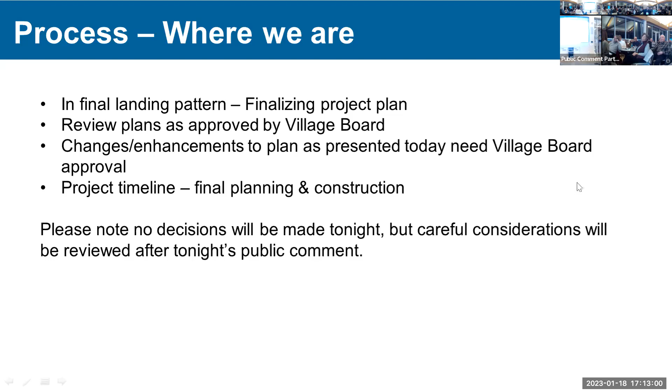So, the project overview: the project basically consists of three parts—the South TAP project, the North TAP project, and the core project.

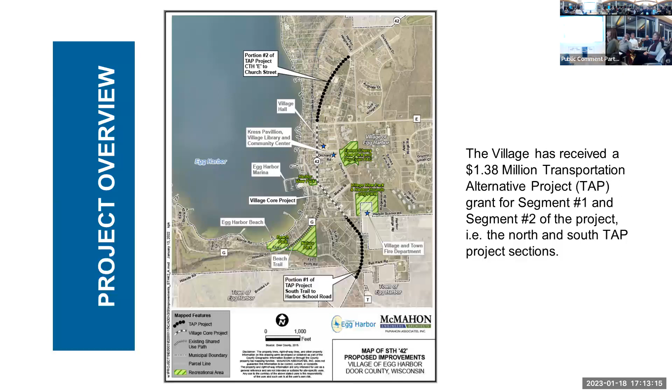We'll start on the south side and discuss the South TAP project, move to the core, and then move up to the North TAP project. What does that consist of? Well, let's go to the next slide, Megan.

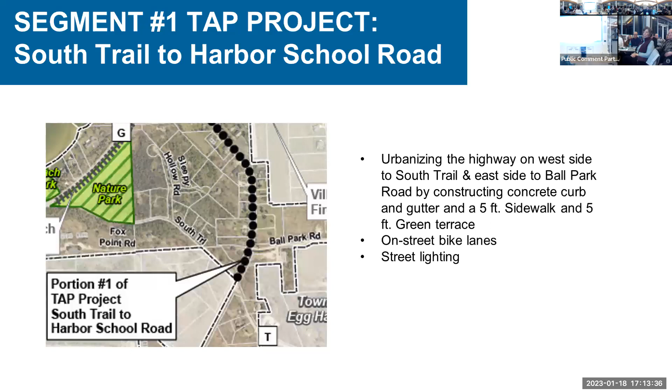The TAP project consists of putting in bike lanes, curb and gutter, grass terraces, sidewalk, and lighting. So what you see here is basically the design for the North and South TAP sections.

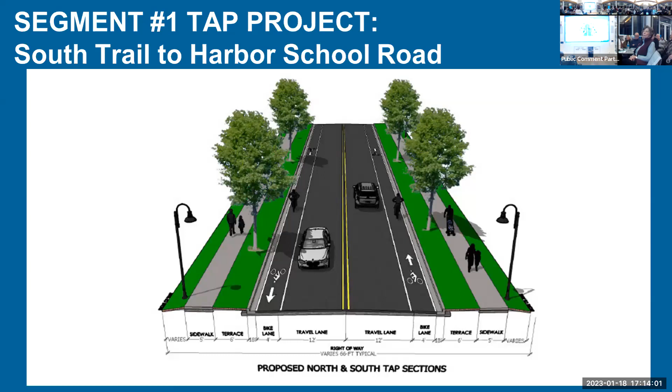In the core project, things change a little bit. We have a 5-foot sidewalk on both sides of the highway, a 5-foot paved terrace between the sidewalk and back of curb, with brick accents along the curb, 8-foot parking lanes, bike accommodations, and 3 dedicated left turn lanes—northbound at County Highway G and at White Cliff, and southbound at the Main Street shops.

As was proposed at our last public meeting, the utilities will be buried. At Highway E, between 42 and Church Street, we'll be putting in curb and gutter on both sides of the street and sidewalks on the south side. We'll also be reconfiguring the Bertschinger Center parking lot to maximize parking.

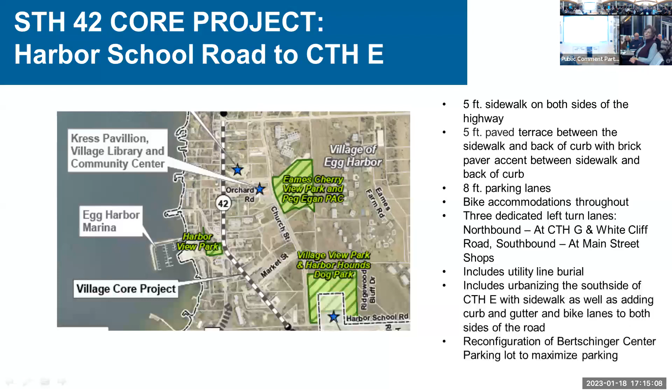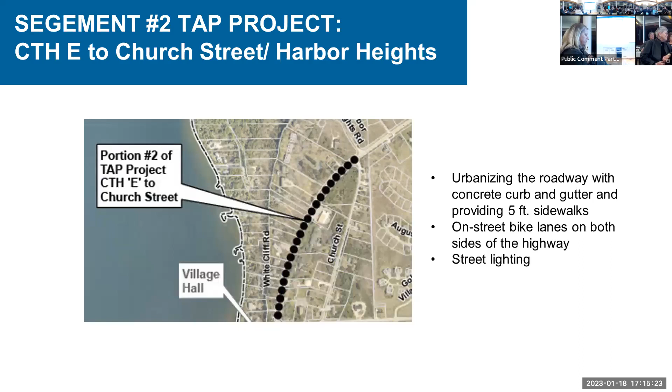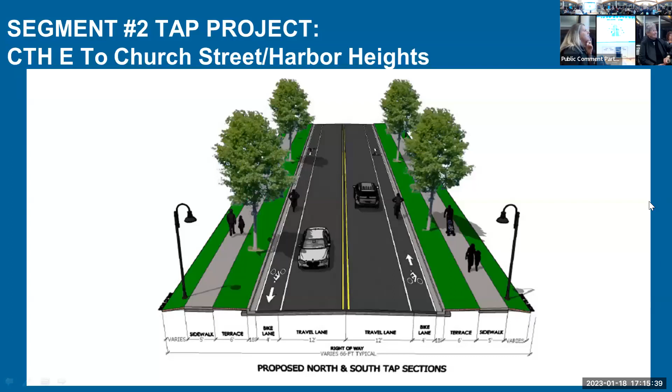That brings us to the North TAP project, and again it's the same thing we saw on the South TAP: 2 drive lanes, bike lanes, curb and gutter on both sides, landscaping terrace, sidewalks, and lighting on both sides of the street. So that's basically it. I'll turn the podium back to Megan.

All right, we are going to be sharing a virtual rendering of the core project with you all tonight, and then some still renderings of the core project as well. I just want to point out a couple notes in terms of those renderings.

If you're joining us here in person, a lot of the still renderings are on display on the east edge of the building here. The video and still shot renderings are virtual renderings of the core project based on drone footage that we took back a few years ago, so there may be some discrepancies as things have changed since then in the village.

Pedestrian rest areas shown in the video are suggested locations. Those locations are outside of the right of way, so we'll have to work with individual property owners on the placement of those. They're just being shown as suggested locations in the renderings you're going to see.

The accent trees and ground plantings need to comply with Wisconsin DOT line of sight guidelines, so there could be some modifications made to those specific species. We also have some finalization to do in terms of the tree grate selection. As you'll see in the video, the paver brick pattern is diagonal.

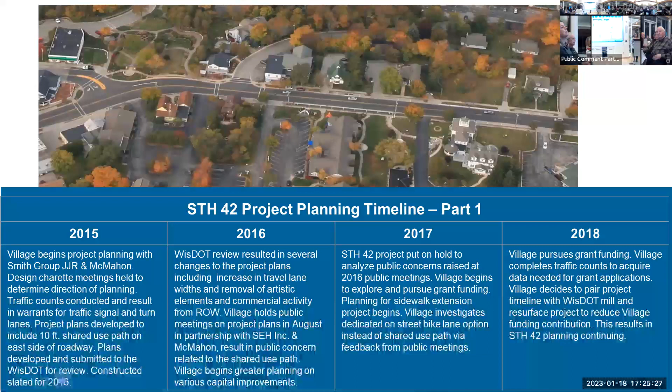Picking up in 2019, the village formally decided to eliminate the shared use path design and incorporate on-street bike lanes. The village partnered with McMahon to develop a 3D animation for the project, and committee members visited other municipalities to review their completed projects. In 2020, the committee reviewed concerns related to the turn lane and looked at options to increase parking throughout the project. At this point, the on-street bike lanes were eliminated and bike accommodations were incorporated into the plans instead.

At this point, the village was awarded a $1.382 million Transportation Alternative Program grant for the north and south sidewalk extension project. In 2021, the village reviewed various options for utilities and decided to table that decision until public meetings were held in August of 2021. After those meetings, given great support for burial of the utilities, utility burial was incorporated formally by the village board into the project plans.

In 2022, we were caught by surprise by a dwarf lake iris species flagged by the Wisconsin DNR as a potential threatened species affecting the project. As a result of that and some other factors, the village board ultimately decided to delay project construction to 2023. Had we not done that, this project would currently be under construction today. So it was delayed for a year.

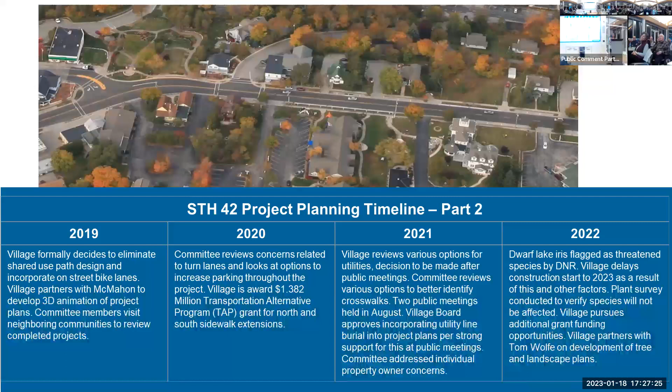Now let's take a quick look at the project purpose and priorities. There's an overarching purpose to replace and enhance our infrastructure, since we have deteriorating and aging infrastructure. More specifically, the priorities are to improve safety for motorists, pedestrians, and bicyclists, promote ease of walkability, improve multimodal connectivity throughout the village, improve access and ease of parking, and maintain the village aesthetic.

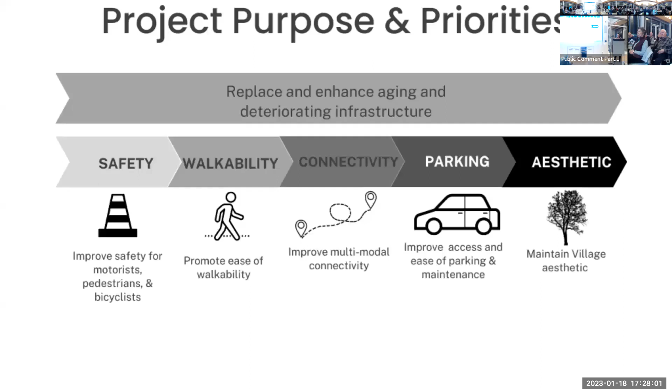Some key project elements related to safety include narrowing the roadway to the minimum allowable by the Wisconsin DOT, traffic calming measures, which we'll review in more detail in a moment, improved pedestrian crossings, additional turn lanes, and rerouting village core bicycle traffic to Church Street.

More specific elements related to traffic calming include narrowing the roadway to the minimum allowable, street trees and planting areas, and urbanizing the highway corridor, starting at South Trail on the south end and Church Street and Harbor Heights on the north end. So as you're coming into town, you're prompted by curb, gutter, sidewalk, and street trees to know you're entering the village, beyond the limits that exist today.

Bump outs will define the entrance to the core and within the core, so that as you're entering the village core, you have a visual cue that the corridor is narrowing, signaling you to slow down. There will be crosswalks with signs, and after construction is complete, we will ask the DOT to conduct a speed study to analyze the speed limit, since speeds throughout the village continue to be a concern.

Our main street is a state highway, which eliminates any authority we have over the speed limit. So we're hoping that these measures we're putting in place will naturally slow speeds, resulting in a speed study recommendation to lower the speed limit throughout the village.

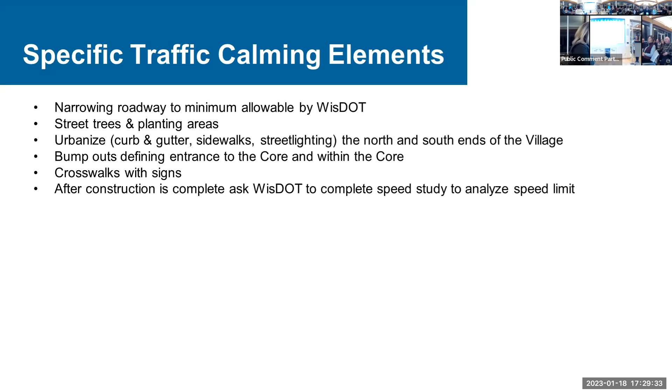Key project elements related to walkability: after construction, sidewalks will meet ADA accessibility standards, and we'll have wider sidewalks to accommodate families and groups. Encroachments throughout the corridor will be removed, and there will be street trees and plantings along the sidewalks.

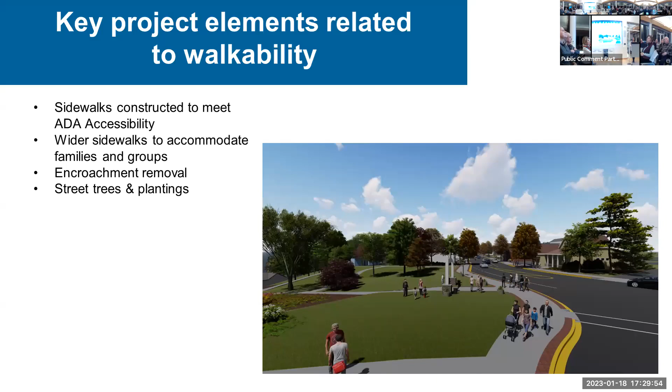Key project elements related to connectivity: sidewalks and bike lanes will be extended south to South Trail and north to Harbor Heights and Church Street, providing access to businesses and residences on either end of town. These are the two areas the grant applies to. On the map shown, the red highlighted area indicates where off-street pedestrian accommodations exist or will exist after construction of the State Highway 42 project.

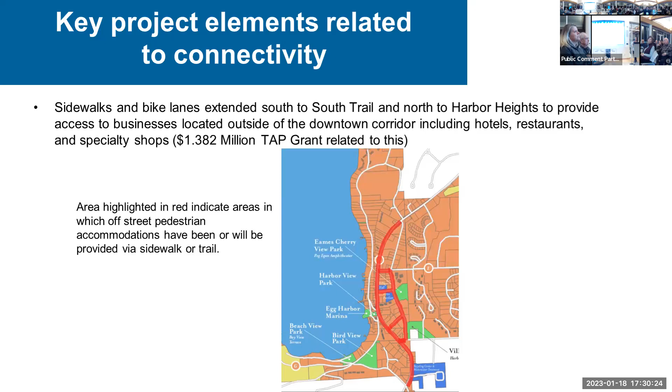Key elements related to improving ease of parking and maintenance: there will be an increase in on-street parking spaces and improvements to the Bertschinger Center parking lot to maximize available parking spaces. Parking space ingress and egress will now be at a 45-degree angle versus the 90 degrees that exists today, for ease of use, efficiency, and ease of snow removal. Since the 45-degree angle is more user friendly, there's less time driving over the curb, resulting in less curb damage.

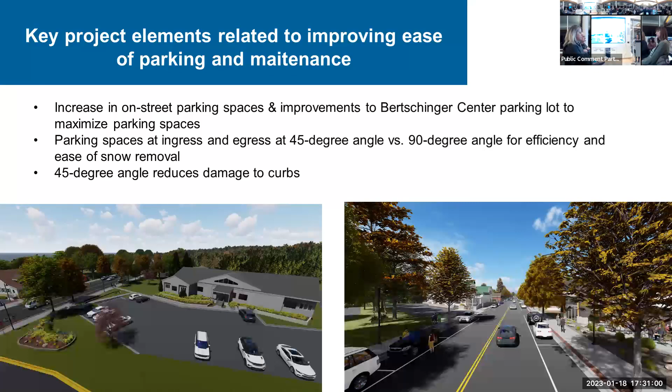Taking a closer look at parking related to the project.

There will be a net increase in parking when all is said and done. Looking at specific areas: from Harbor School to Market Street, 19 stalls exist today, 34 are proposed. Market Street to County Highway G, 19 exist today, 24 proposed. County Highway G to Orchard Road, 26 exist today, 25 proposed. Orchard Road to County Highway E, 10 exist today, 39 proposed. So on-street totals only: existing today there are 74, and as proposed there are 122.

This includes the Bertschinger Center improvements. That lot, Bertschinger Center specific, not including the post office side, has 21 dedicated spots that will be increased to 37. Taking a look at all parking improvements related to the highway project, there's a net gain of 64, with 95 existing and 159 proposed.

Also, in addition to the State Highway 42 project parking improvements, we have recently added 188 parking spaces on Church Street.

All right, and lastly, key project elements related to maintaining the village aesthetic: narrowing that roadway, lining streets with trees, both street trees and accent trees, adding planting areas, and providing pedestrian rest areas along the State Highway 42 corridor.

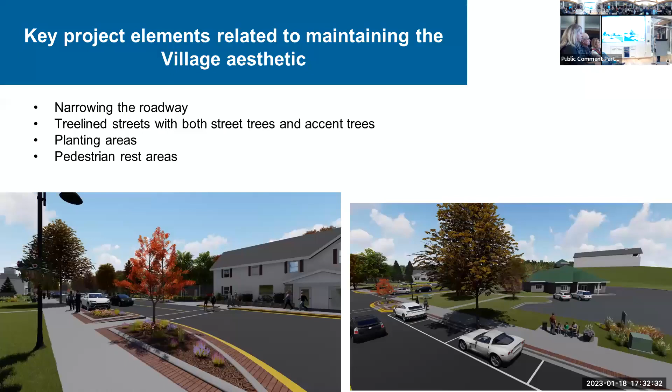Speaking of the trees lining the corridor, I'm going to pass it on to Ken and Tom to review the street tree plan.

Thank you, Megan. Hi, everyone. Good to see everybody.

First, I'd like to introduce Tom. There you go. Good.

And an interesting fact about Tom, Jensen's great-grandson was an intern for Tom.

Very cool. All right, so we brought Tom in to do three things for us. First, to work with property owners along Highway 42.

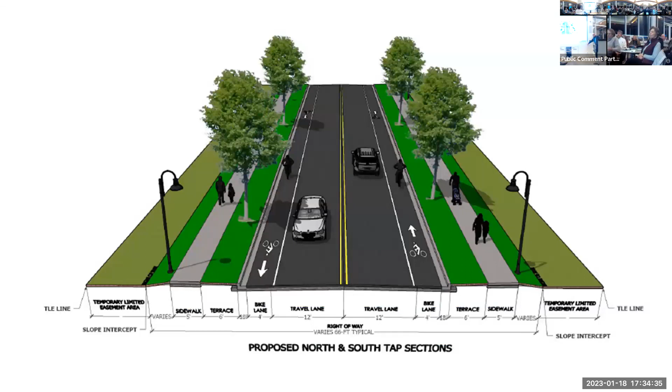So this is the North Tap area that was priority 1, I think starting in like... no. Oh, okay, that. Yeah, I need some spinach.

I think it was the August, September timeframe where some of the property owners up there came to us with some real concerns and fears about loss of trees in that area. And I can understand why those concerns were there. So first, I'd like to talk a little bit about this diagram to explain to everybody what area we're really talking about.

This is called a typical section or a cross section, and the key is down here. We have a 12-foot travel lane - along with the bike lane, the 12-foot travel lane is the narrowest travel lane we can have. Then from the curb to the sidewalk, it's called the terrace. Then we have the sidewalk. Then we have this little area where you have to blend the edge of the sidewalk to the ground along those properties - that's called the slope intercept.

And then when you get out of the slope intercept, there's something called a temporary limited easement area, where some construction equipment and people have to work in order to finish this slope intercept off, okay? So the concern was that in the slope intercept and the temporary limited easement area, there's going to be some disruption.

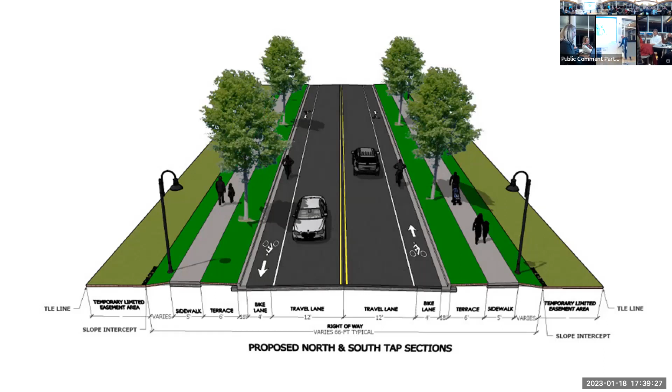Hello. Okay, everybody hear me? Yeah. All right, so what we're gonna do when we looked at this North Tap section...

The first thing we had to do was identify the trees, see what we're working with here and see what's worth saving. So we looked at the criteria of what's the health of the tree.

After we identify the species, there's a lot of ash in there. We all know the emerald ash borer is hitting ash up there. So we have about 37 to 40 ash trees that have to be removed. If they're not removed, they will become a nurse tree, and the emerald ash borer will then live in that and affect the other healthy trees in the area.

So we looked at trees, whether they were worth saving, the benefit of saving them. Some were buck rubbed, some are volunteers - meaning they were planted by themselves, and they're in clusters, on angles, growing into other trees. We asked, is it worth saving at the cost benefit?

So we marked all the trees that we are gonna try to protect, that could be protected with snow fence, physically protect them, or treat them, pre-treat them with a chemical that mitigates the damage from construction. It's called Cambistat. We've treated those trees.

We treated approximately 428 inches of trees in the North Tap and some in the core. What it does is it slows down the top growth of the tree, or the crown growth of the tree, and encourages root growth. That's the part of the tree that's going to be affected by the construction. It shortens the internode of the tree and puts the energy into the root system, and makes the cuticle of the leaves thicker so that it can survive the soil disturbance.

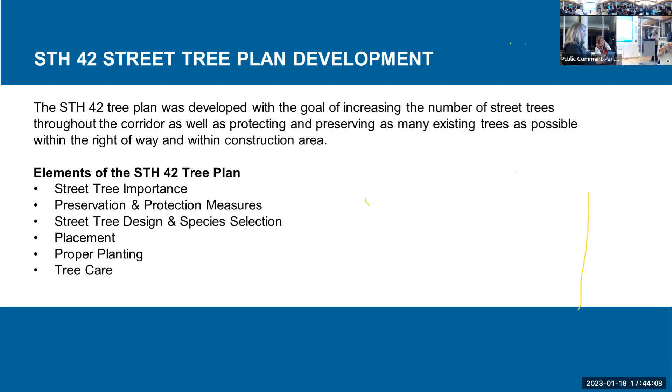So then we looked at what kind of trees we're going to put in and how many trees we were going to put in the North Tap, South Tap, and in the core. Approximately we have 52 trees in the core, 50 in the South Tap, and 70 in the North Tap. What we did with the design is that the core, of course, is going to have trees that can survive the urban conditions.

It can take compacted roots, it can take high pH, which we have here in Door County - that's a major problem, the pH. This tree is aesthetically pleasing. It's got really interesting bark on it, exfoliating bark.

This has been used and observed for about 30 years, since 1994, in urban conditions. It's used in a river walk in Chicago, used in parks in Chicago, used in Milwaukee, at the University of Wisconsin Arboretum and Longenecker Horticultural Gardens. So this is a very good tree for urban conditions.

It can survive drought - it's drought tolerant. It can stand flooding, and it's a riparian or river bottom species. This tree is extremely hardy. It's got a massive root system, which we need because with a situation like this road, you have a wind tunnel - high winds coming through there, coming off the lake. So we need something that can survive it. It's hardy to our zone, zone 5.

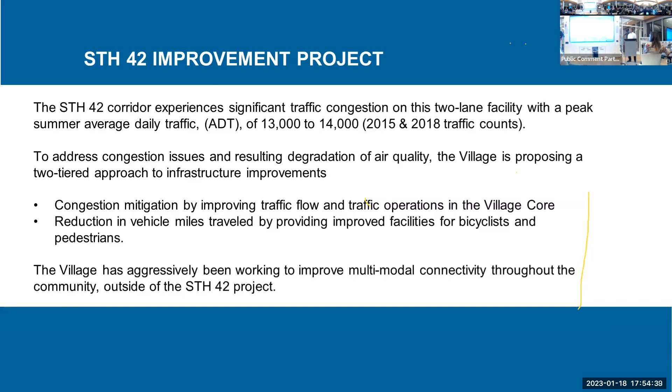The Village of Egg Harbor is a Wisconsin green tier community. The goal of the green tier community is to network and develop strategies leading to a sustainable future, and a big part of that is transportation management.

I mentioned degradation of air quality in the previous slide. I'm not sure how many people realize this, but Door County is one of 11 counties in the state of Wisconsin that is a non-attainment area for federal pollutant standards, ozone and fine particulates. So improving air quality is a real issue. The green tier strategy to reduce greenhouse emissions and vehicle miles traveled is, as mentioned previously, to make improvements to the infrastructure and improve traffic flow, as well as to reduce vehicle miles traveled by improving multimodal connectivity throughout.

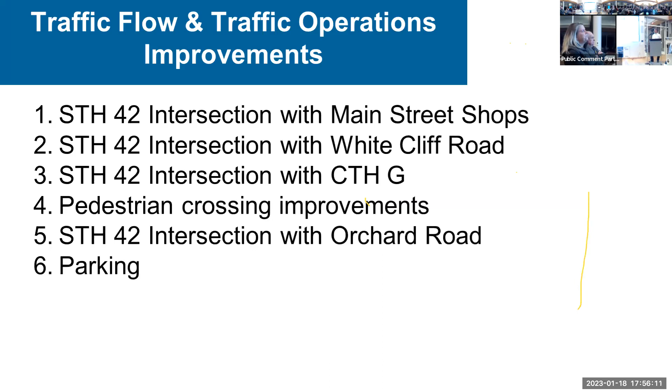The first prong we talked about is traffic flow and traffic operation improvements. There are 6 key steps to this, and we'll go through each in more detail. The 3 main ones are the intersections of Main Street Shops and White Cliff Road with 42, pedestrian crossing improvements throughout the corridor, improvements at the 42 intersection with Orchard Road, and parking improvements.

Currently, the way the project is set up, it's a 2-lane road, so if you're going through or turning left, you're doing it all from the same travel lane. By adding a left turn lane, you create the opportunity for vehicles to pull safely out of the through lanes of traffic and help prevent the traffic queues that build up behind it. I've seen traffic queues routinely in the summertime with 600 feet backing all the way up to Orchard on that approach, and the person doing the traffic counts noted this was happening throughout the day. These counts are done in July and August, so they're really the peak times, but it gives some idea of the issues that exist out there right now.

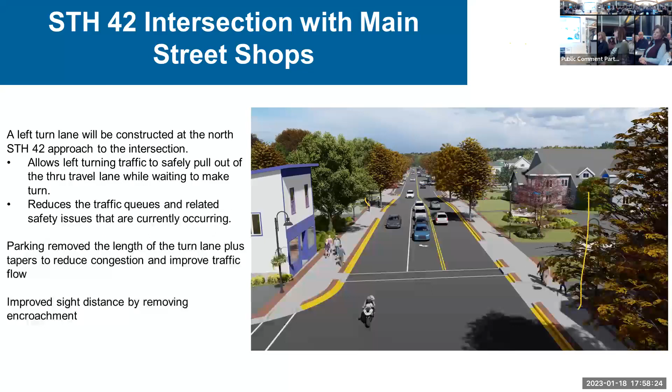That really restricts sight lines. As you're waiting in this left turn lane, Megan and I just did a practice run on it again today. You really have little time watching vehicles coming around that curve to see where they're coming from. There's a building encroachment at that location that the village is working with the property owner to remove a portion of it.

That will help improve those sight lines and provide us the room to make our improvements. Intersection of White Cliff Road, you can see we're just coming out of the turn here. That curve I mentioned previously, same improvements.

Move traffic into a separate lane so it can wait to make the left-hand turn, which reduces the traffic queues. The traffic queue is backing up, but it's occurring most significantly in the areas to the north from the Main Street Shops. By traffic blocking southbound traffic, these left turns onto White Cliff Road have an easier time because traffic is blocked to the north. But it meets the warrants for a left turn lane, and that's what we're pursuing here.

And the removal of the previous encroachment. This is the building we talked about. This drawing shows it without the porch that's on there right now.

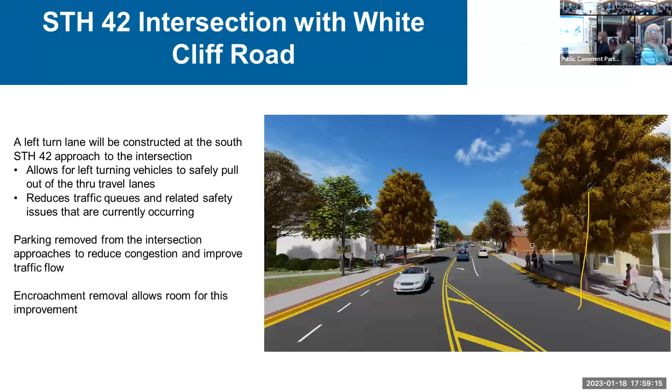Okay, here you can really see where the curve is coming out of G. You can see when you're up in here, it's very hard to see as you're coming around the bend. So the turn lanes are out there right now. We're maintaining the same left turns and right turns at this intersection.

We're removing some parking immediately adjacent to the intersection with G. That's right in here, there's a few stalls coming out. These stalls make it hard for vehicles coming out of G to make a right or left-hand turn. The sight lines are blocked by the turning vehicle, so we're removing those to improve the intersection sight distance.

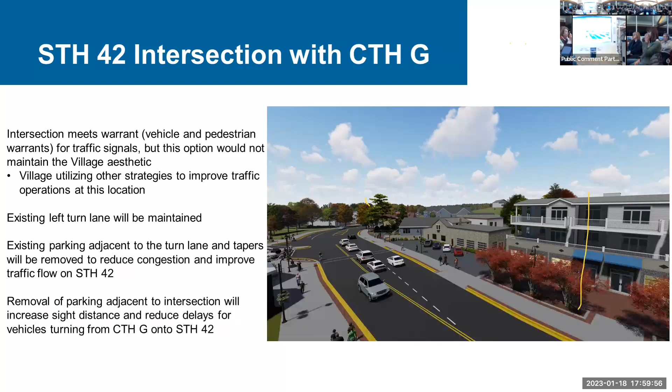Pedestrian crossing improvements. Looking to improve signing and pavement marking throughout the corridor to heighten the awareness of vehicles that there are pedestrians in the street. Currently, there's a lot of jaywalking in this area of the corridor, so we're trying to get them concentrated at a protected pedestrian crossing.

What we're showing here is the crossing that exists today at G. This was part of the overall concept for improving traffic flow on the corridor, to provide this crosswalk with the pedestrian refuge island out in the middle here.

Previously, if you remember, cars were stopping. Let's see, the pedestrian crossing was right in here. So it was very difficult for a car hanging a left off of 42 to see pedestrians crossing the road at that location. So now they're out in front where they should be, per current standards, and they're much more visible for vehicles.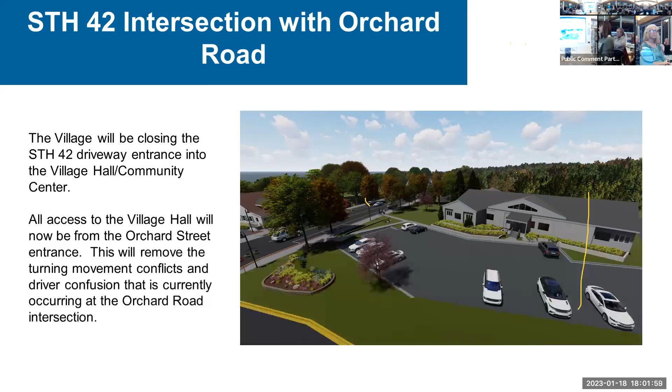Parking - and Megan mentioned parking previously. By improving parking, we make it easier for cars to get in and out of the stalls. Currently, there's a bump out at every driveway pretty much throughout, and the stalls are at 90 degrees, so it's difficult to get in and out of those stalls. The idea is to make it easier for cars to get in and out of the stalls, so they're not jockeying their way into their stall while people are waiting on 42 to get by.

In addition, by removing the bump outs at the driveways, those end stalls can be accessed without having to go through a bump out, which they currently do. So by removing the bump outs, it also provides us more space on 42 to add parking.

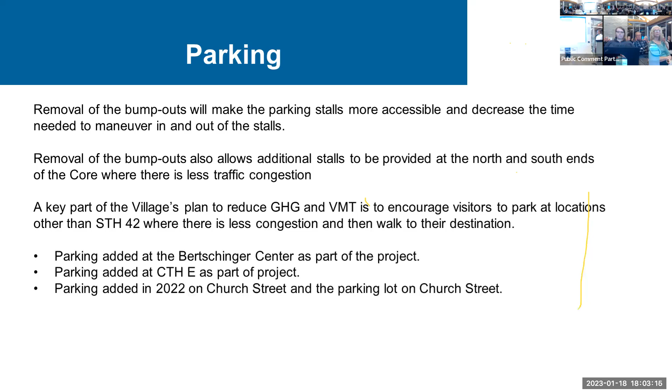Parking is added as part of this project and as part of the Church Street project to allow people to park in places other than 42, where it's less congested. For example, the center is being reconfigured, as Megan mentioned. We're also adding parking on E as part of the project on the south side of E, and then the parking added on Church and at the parking lot on Church. So those are the two parking additions.

Pedestrian improvements: there are obvious pedestrian improvements in the tap section, as there are no pedestrian facilities right now, except at the very south end of the north tap and north end of the south tap. So we'll be adding sidewalk throughout, ADA compatible sidewalk.

In the core, the existing pedestrian facilities are asphalt paths that are aged, narrow, and don't meet ADA standards. In a lot of places there isn't a terrace, or if there is, it's minimal. So we're constructing a new concrete sidewalk that's ADA compliant, with a consistent 5-foot terrace throughout that keeps pedestrians buffered between travel lanes and parking lanes. Also, when you open your car door, you're not opening into the sidewalk.

There'll be a paved surface back to the curb in the core areas. That'll allow people, when they get out of their car, to step onto a paved surface. It's also easier to maintain in the wintertime as far as moving snow.

We're installing a continuous energy-efficient lighting system to improve safety and encourage more use of the sidewalk. People feel more comfortable walking through a lighted sidewalk area versus walking through a totally unlit corridor.

The pedestrian improvements on Harbor School, the existing facilities at Orchard and on Market, provide links to the parking on Church Street. As for bicycle improvements, again, there are no bike facilities in the tap section.

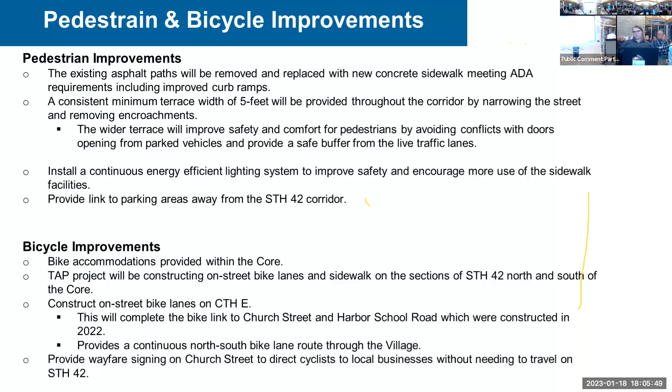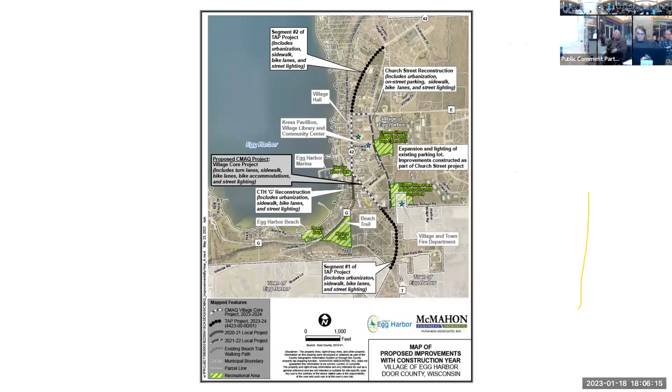We had a meeting in 2021 with some changes that happened to the plans over that time. The South Tap section was a big change. Originally, there were only sidewalk improvements on the west side of the road. The village made the decision to add them to the east side as well, down from Harbor School Road to Ballpark Road. Ballpark Road is a logical place to end it because there's an intersection there.

Originally, for stormwater quality elements of the project, in the north and south parts there are grass ditches that the DNR considers a stormwater treatment facility. So when you fill in those ditches and add pavement and storm sewer, you have to add some type of stormwater quality improvement. Originally we were going to use biofilters, but now we're able to make it work differently—we're going to add catch basins that will need to be maintained by the village annually to clean them out. That's how our stormwater quality requirements will be met.

In the last plan set at the last public meeting, the sidewalk was continuous along the right of way, so the back walk was at the right of way throughout. That's been changed, so now it's a consistent 5-foot terrace throughout, giving an even more consistent look to the village.

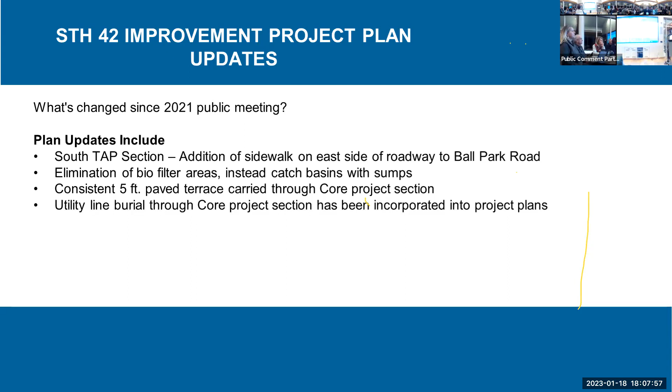Utility line burial areas were discussed at the last meeting, but they're now shown on the plans on the roll plots we have out there, indicating where utilities will be putting their above-ground facilities.

Okay, utilities in the core areas. The village approved in August 2021 to bury the utilities. Since that time, the village has been working with utilities to determine where their facilities have to be. They're going to have transformer bases, pedestal bases, that type of thing. Those have to be above ground, and we're requiring permanent limited easements for those. That acquisition process started shortly, and the utility construction itself will be occurring concurrently with work on the core.

In addition to the utility work in the core, the north and south tap will also have utility relocations. The existing power poles are kind of in the area of the sidewalk or in the terrace areas. We're planting trees in the terraces now, and we're putting street lighting all the way through. Those will be located at the back of the sidewalk, so the poles are going to be relocated behind the sidewalk in existing right of way.

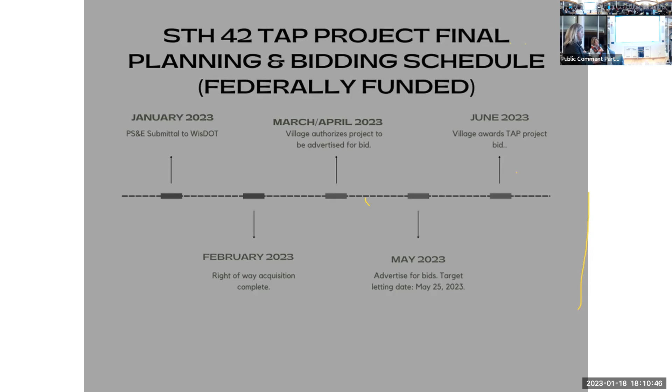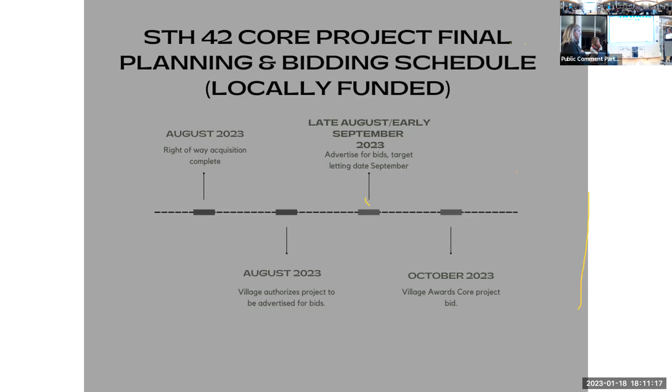The core project, which is currently locally funded, 100% village funds -- in August of 2023 we anticipate having right of way complete. Again, it'll be starting in February and finishing up in August. Then the village will authorize the project to advertise bids, again through the Board of Public Works and the village board. In late August, early September, we'll be advertising and awarding bids, with the awards being in October.

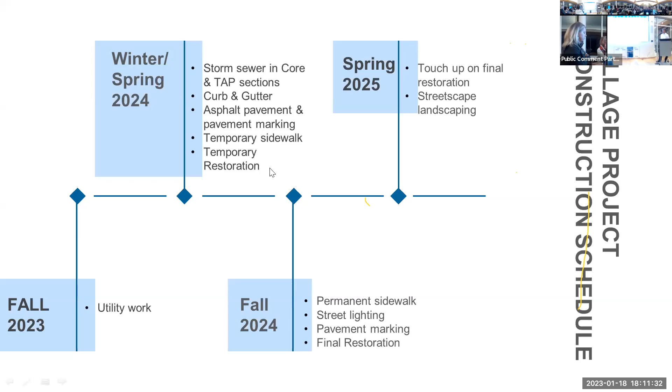Construction timeline: the spring of '23 is when the utility work begins in the TAP section -- they're going to start relocating their power poles in spring of this year. There's a lot of work happening out on 42, not just this project. Then in the fall of '23 is when they'll start their work in the core, burying facilities.

The village is being allowed to close Highway 42 starting in January through Memorial Day, the Friday of Memorial Day weekend, with a detour route provided which I'll go over later. The project in that timeframe would consist of new storm sewer, curb and gutter, asphalt pavement, temporary sidewalk, and temporary restoration -- trying to get something in place for the start of the tourism season after Memorial Day.

The DOT has got a project in here too, which we'll discuss a little bit, and they'll be starting probably right after we wrap up. We need to have that curb and gutter in place so when they come through and do their mill and overlay project. Permanent sidewalk and street lighting will be starting in the fall of '24; we'll be finishing up street lighting and final restoration, final pavement markings at that time. In the spring, due to lateness it could be late when we're planting grass and all that, and our erosion control will be touched up in the spring of '25.

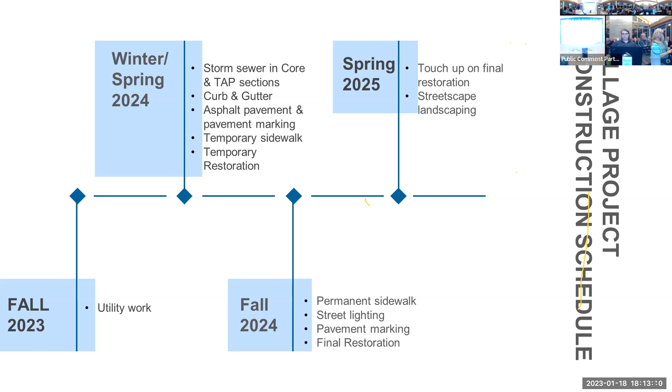Okay, the DOT's mill and resurface project. The village has been working with the DOT throughout. They've had this plan to mill and resurface the two travel lanes on 42, starting south of the village and extending to the north. Right now their project is scheduled for 2024 spring bid letting, and they've been working with us -- they haven't really set a construction plan yet. We're going to keep coordinating with them, but they've been good to work with. They've moved their let date a couple times as well.

So this map shows the relationship of the DOT's project -- Rainbow Ridge at the south of the village, going all the way up to Bluff Road in the town of Gibraltar. The village's project is shown in red. So their project is much bigger than just milling and resurfacing through the village.

Methods the village is using, and steps we're taking to make construction as least impactful as possible to area residents. Restricting the construction to less busy months of the year should have less impact on business.

Timing of Church Street was such that we could get that road done, have that parking in place for the time we close Highway 42 to provide alternate parking while construction is going on. So when 42 is being reconstructed, that on-street parking will not be able to be utilized during construction.

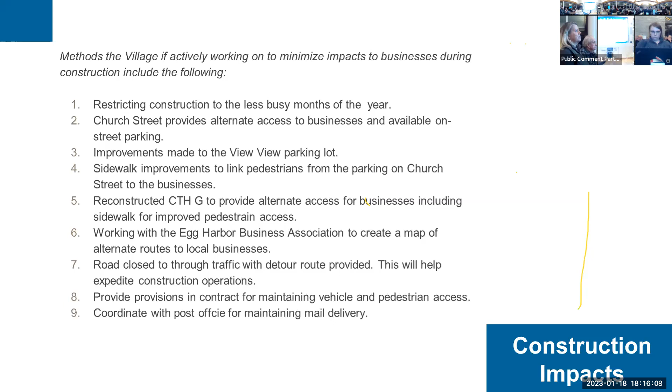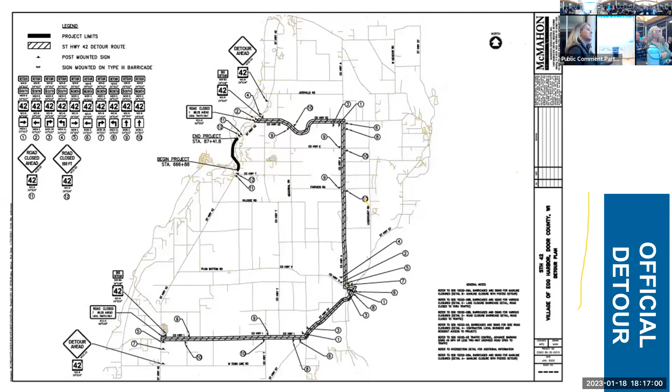Local access will be maintained throughout, so you can get into the village. The idea is if you don't have business in the village, you have the opportunity to drive around. So the intent is everyone in the village is not going to be riding this route. If you live in the area, you know the roads and how to get to and from. It's an official route that has to be marked for Highway 42.

There are two additional federal funding opportunities for the village that will fit in with the 2024 construction year. The construction timeline is not going to change.

The Congestion Mitigation Air Quality, the CMAQ funding, is a funding program consistent with the village's green tier strategies pointed out earlier. The application was submitted for that in June. Projects were supposed to be selected in August of '22, but they still have not been selected. They don't give a lot of hints on whether or not we're getting funding, but they said the village is under consideration, which is all they'll say.

So the latest funding deadline is February of 2023. In addition, there are additional transportation alternative project funds available, all through the bipartisan infrastructure law, BIL—I'm sure you've heard of that in the news. That's the same funding being used for the north and south half sections on 42, and it could then be applied to the core.

So these funding opportunities are for the core. Everything's set for funding in the TAP section. The application for that funding is in March of '23. It's only for projects being built in 2024, and they're focusing on communities of under 5,000, so hopefully that gives us a good shot at it.

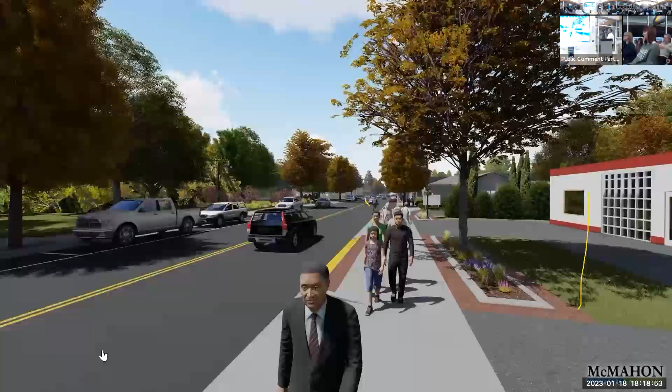What was that music? Yeah, I don't know if it plays. There was music on this one. Was it? Yeah, it might just be because of the house system. So the intent was not to sit here in silence. Yeah, sorry.

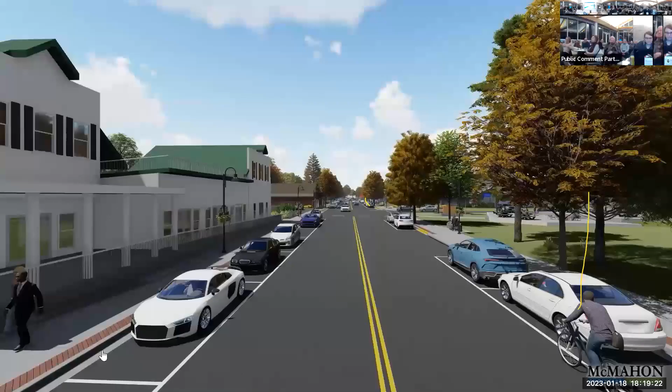You can see all the bump-outs have been removed from the driveways. Areas that are marked yellow for no parking—a lot of that's pretty much what exists out there today.

Coming up to the turn lane on Highway G.

The still renderings that have been shown throughout the presentation, as well as on the wall, all came from this—they're just cut right from the same model.

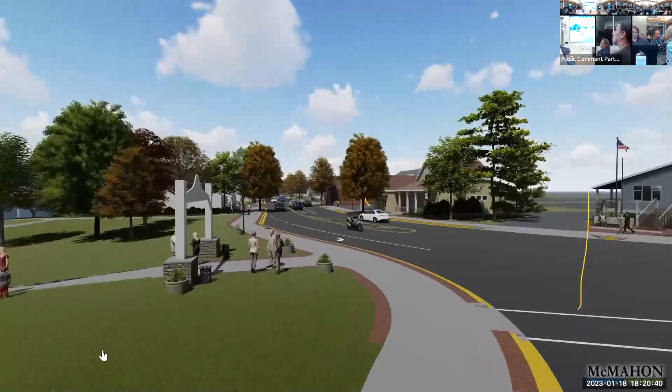New left turn lane for northbound onto White Cliff Road.

See the tree wells for the trees that Ken was mentioning, those that haven't been officially picked out yet, the sod.

Just went by a pedestrian rest area. I don't know if it's the next one, there's another one at the very end. Right, so right here's the pedestrian rest area that's shown on the roll-ups as well, just an area with some benches.

Waste receptacles, a planter, that's set back on private property as well. If we're talking to property owners about it, just to keep the walk corridor open instead of having a bench in the corridor.

The planters on the street lights, those are going to be maintained. You can see just an example of a transformer base with some possible screening around it.

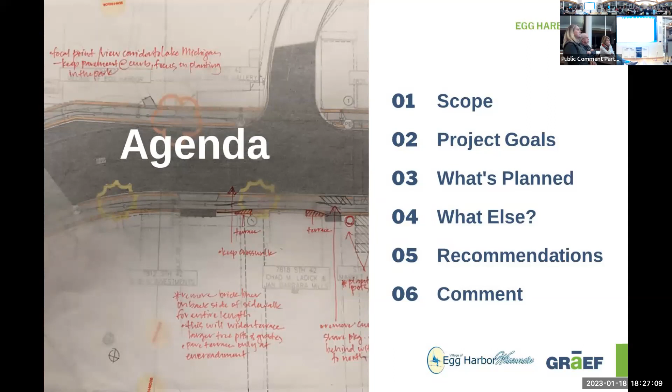I knew I would have trouble navigating two screens. There are two minutes, it's okay.

Okay, first our scope. Our instructions were pretty clear. The idea is to focus on the core. You've heard about those three segments, the two taps, north and south, and then the core. Our focus was on urban design review and recommendations around the downtown core of the project.

We were instructed to look at the streetscape and pedestrian zone outside the curb to curb area, the right of way, and safety, and the proposed southbound turn lane north of White Cliff, which John will get into in more detail a little later on, and overall general traffic calming conditions.

Some background on the work we've done: we were hired in November, came in December, and had a fabulous site visit with tours of the village and the main corridor across all three segments. We did walking tours and driving tours, and like you all heard tonight, got great background on the project and its history, learning about the layers involved with the public and community feedback so far.

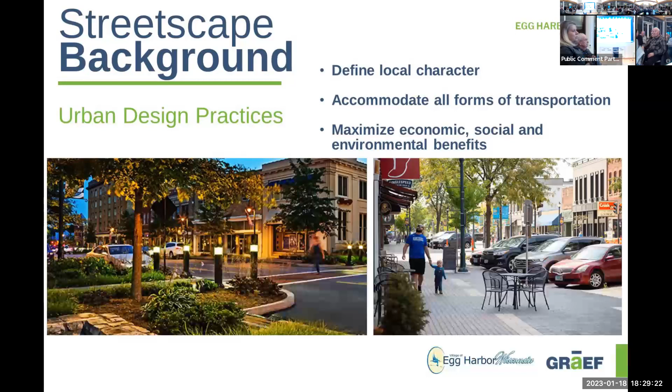As planners and urban designers, it's not just about one mode, it's about considering all modes—whether pedestrian, bicyclist, or vehicle traffic—we want to keep all of those in mind as we develop ideas and recommendations around the corridor. It's a very holistic approach to designing roadways and commercial corridors.

So the second piece of our analysis: the left turn lane assessment. The diagram you see has a street on the left and a road on the right. What's in the middle is what is affectionately referred to as a 'stroad.'

Our best practices and minimum goals for urban design are making sure we're meeting minimum engineering requirements, ensuring adequate safety for all modes, and maximizing the social, aesthetic, and environmental opportunities. It's become very clear that the Village of Egg Harbor very much desires to achieve what is happening on the left and avoid what is happening on the right.

So it's about slowing traffic, putting people, bicyclists, and transit—maybe not necessarily first in this case—and focusing on the buildings, filling gaps, expanding existing structures, and embracing complexity. And there's always complexity involved.

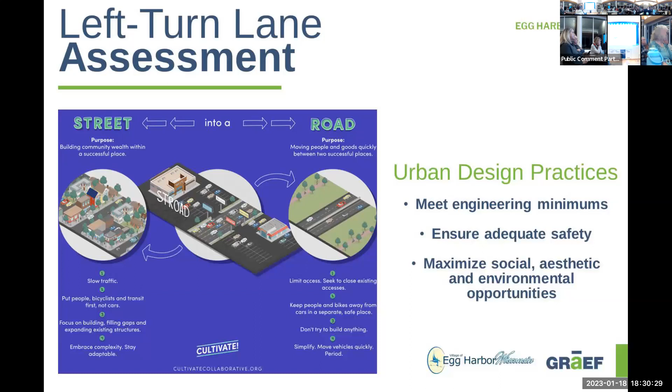And then finally, our approach to traffic calming. You'll see three equations there: high versus low speed, stressful versus predictable, and high versus low levels of activity. For that first one, it's about creating friction and trying to reduce speeds, making sure there are elements within the plan addressing that.

It's about creating predictable situations and organizing the space for that level of predictability, avoiding levels of stress, and creating high levels of activity—whether through the environment itself, creating outdoor rooms, having space for people to window shop, go in and out of shops, and making sure they're traveling through the corridor safely and stopping where they want to stop.

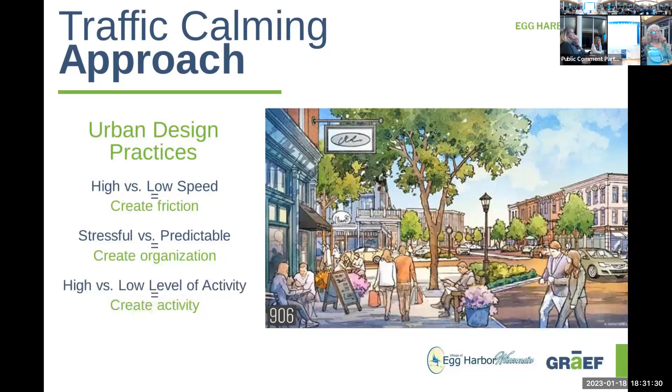So some project goals we have learned and understood along our process: enhancing the quaint character, which I think is probably most important and very well understood; highlighting a sense of arrival and communicating that character as you enter the downtown core; expanding and improving pedestrian zones; and strengthening linkages and connections to community landmarks and parks.

We've gotten feedback around softening the terrace and creating a welcome, comfortable environment, which in turn has positive environmental and stormwater management impacts. Also slowing traffic and creating, as Mike described as part of the engineering, those 45-degree angled parking returns for on-street parking to ease getting in and out of parking spots.

Consistency throughout the downtown, whether in materials, the materials palette, signage, or furniture—all of that creating a consistent palette. It's very obvious a lot of that already exists, so it's about building on that, enhancing it, and developing it beyond what's already here.

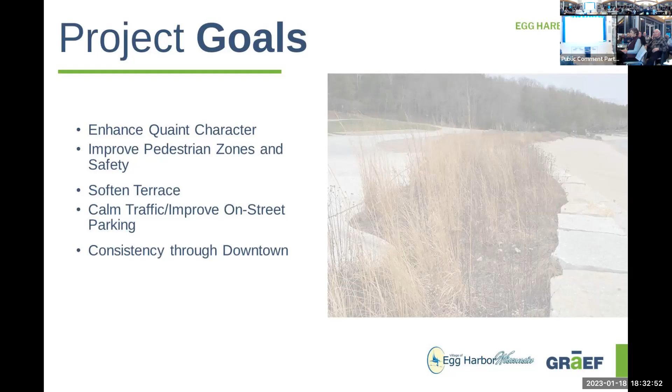So what's planned? Street redesign, burying utilities, brick terrace details, widening the sidewalk, traffic calming and narrowing of the roadway, street trees and landscaping, on-street parking reconfigurations, pedestrian rest areas, crosswalk additions, street light relocation.

There are a lot of positive elements considered and planned as part of the current proposal, and clearly careful thought and consideration through stakeholder and community involvement went into the planning and development to date.

Some notable items already in the plan: burying utilities to eliminate visual clutter, brick terrace details which break up the monotonous concrete sidewalk surface, widening the sidewalk to accommodate pedestrians and busy traffic, and really encourage growth outside the high tourism season.

Traffic calming and narrowing the roadway at busy intersections with curb extensions, street trees and landscaping, which creates a consistent and visually attractive environment all season long.

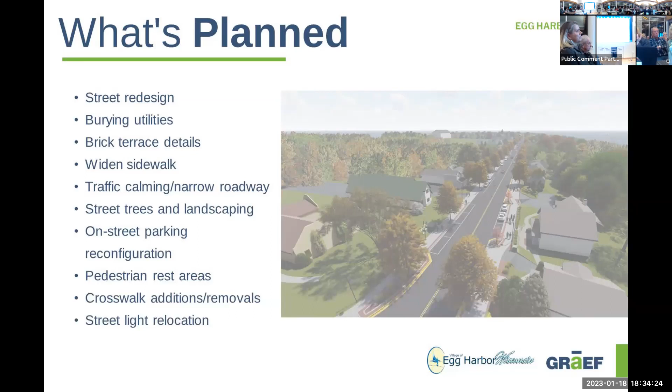On-street parking reconfiguration, pedestrian rest areas, crosswalks, and I did say I wasn't going to spend a lot of time on this, so I'm not. I'm going to move on to the next one, because I think you've heard and understand a lot about the elements that have already gone into it.

So what else? This is a list of some additional items we have considered as part of our recommendations and ideas. It was a little bit about building off of what's already there.

Additional curb extensions, additional crosswalks, perhaps mid-block connections, removing unused and unsafe curb cuts, maybe reconsideration of low-impact pedestrian signage at particular locations where there are high volumes of traffic.

Urban design opportunities around site furniture, planting beds, additional planting pots, screening of the utility needs, path lighting at particular locations, and then gateway signage and temporary public art.

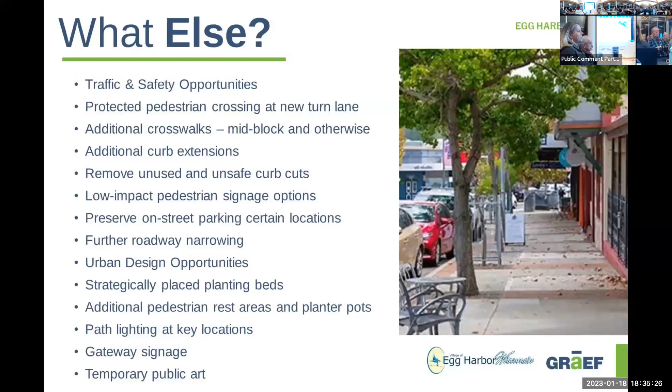But take a closer look, there's a lot more detail and you'll be able to read it a little more closely than on screen here.

Signage and kiosks at 3 locations as you enter from the north and the south, and then somewhat of a central location, perhaps near the post office and Village Hall.

Could you use the pointer, please? Oh, sure, okay, yes. Use some muscle with it.

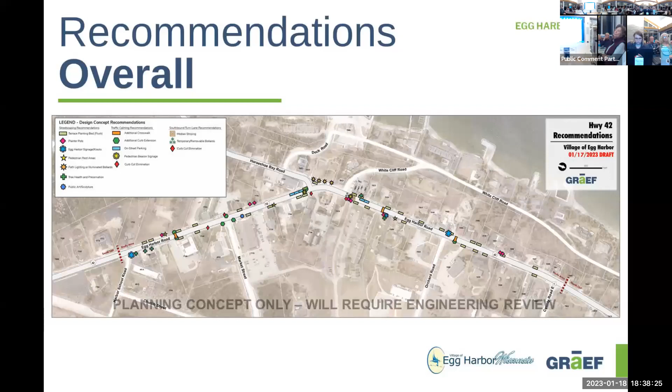Okay, so breaking into 3 pieces, recommendations specific to urban design. Additional planter pots were identified with the pink diamonds.

We located some additional key locations throughout the core of the corridor where we thought an additional planter pot would soften views or perhaps screen utilities. Maybe there's also an opportunity for additional pedestrian rest areas there, which could be located up and down the core of the corridor.

Signage kiosks, as I mentioned, alert visitors that they've entered the downtown core of Egg Harbor. I also mentioned pedestrian rest areas at additional locations at key points of interest. Many of these items enhance what's already there—they've been addressed and added, and our recommendations suggest opportunity for some additional locations. Path lighting to highlight the park and views of Lake Michigan, and the opportunity for art and sculpture.

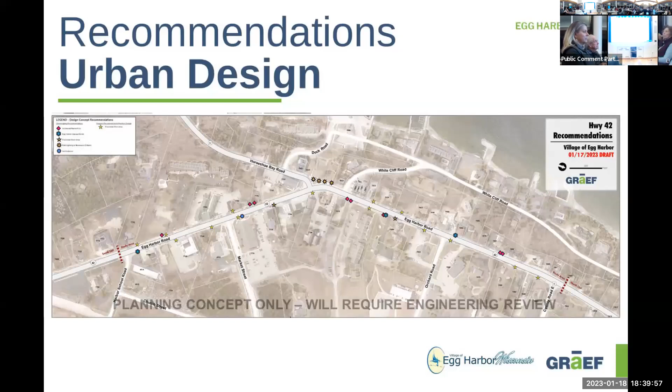I want to mention that much of our presentation includes imagery and photographs from other communities that represent the elements we're trying to convey. The conditions may not be exactly as they are here in Egg Harbor in terms of the width of the terrace or sidewalk, but we're trying to give a visual representation of the individual elements themselves.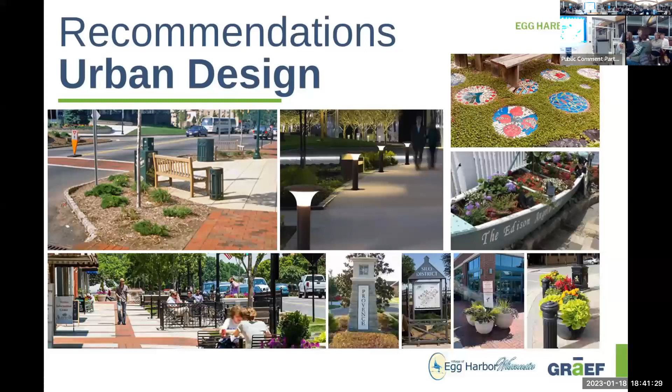For some additional and detailed recommendations around the terrace, traffic calming, and the left turn lane, I'm going to turn it over to Dominic. Thank you.

I'm going to dig into a couple of the details about some of our more specific recommendations that aren't located on the symbols you saw on those overall maps. If you had trouble reading those maps, don't worry—the intention was more for you to look at them on the boards than on the screen. A couple of these ideas aren't at one location, but instead are ideas to reconsider the design of the entire stretch of the corridor on the terrace.

There are other challenges we've heard along the way that we needed to address in figuring out an alternative design. We can't just add a whole bunch of turf because there are maintenance considerations in high pedestrian areas—turf tends to turn into trampled dirt. There are also several encroachments along the public way that complicate having a consistent sidewalk and terrace design along the entire distance. At the same time, we've identified several positive elements in the proposed street design.

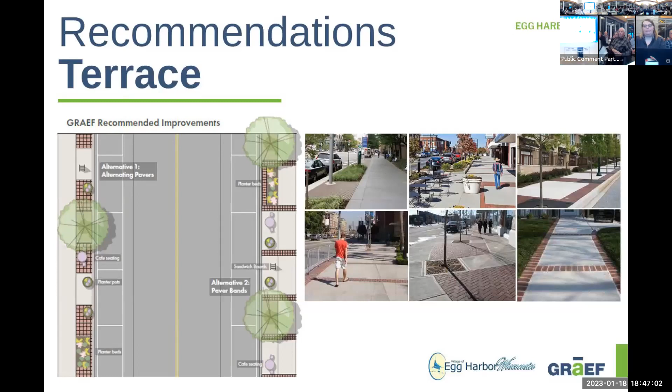If an alternative to the terrace is desired by the village, we can work out some of the kinks about how this would work when it approaches a corner, when it approaches a driveway, and all those edge cases where it's not just a straight perfect line, as no roads actually are.

The second thing I wanted to address was that we were asked to review the left turn lane and any safety concerns we might have regarding it. I've designed several streets for improved safety, especially with turn lane improvements. Oftentimes, while turn lanes are merited or warranted on a street, there are still additional considerations for pedestrians, cyclists, and all other users besides cars that can be made to improve the area—considerations we apply to several of our projects.

Turn lanes generally do a lot to improve safety, especially vehicle safety. As I understand from our engineers, they do a really good job preventing rear-ending incidents and, in general, make roads more predictable for drivers, giving everybody space for different actions rather than panicking to make a turn quickly because you're trying to get between a gap in cars—and because you panicked, you didn't see a pedestrian at night.

On the other hand, increasing the crossing distance of a roadway also decreases safety for pedestrians. So when looking at any lane addition, whether a turn lane or a travel lane addition, we want to look at what we can do to improve safety, since any increased distance generally decreases safety for pedestrians.

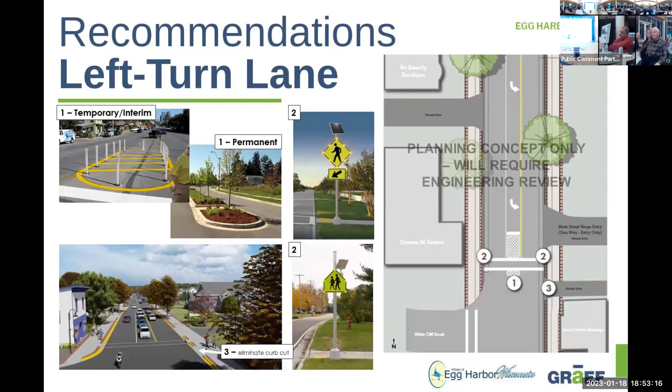So in addition to those specific recommendations, we have a version of that earlier board you saw, but just showing traffic calming recommendations that have to do with pedestrian safety, such as crosswalks, the bump outs or curb extensions—those are interchangeable words—and the striping or curbing of the median, and all the curb cut eliminations.

We've distinguished between the curb cuts that are already proposed to be eliminated in the design over on that table, and a couple additional curb cuts we've identified that may be possible to close as well, since they're unused or maybe duplicative and redundant for a parking lot. We've also identified what curb extensions are already proposed versus what we're proposing.

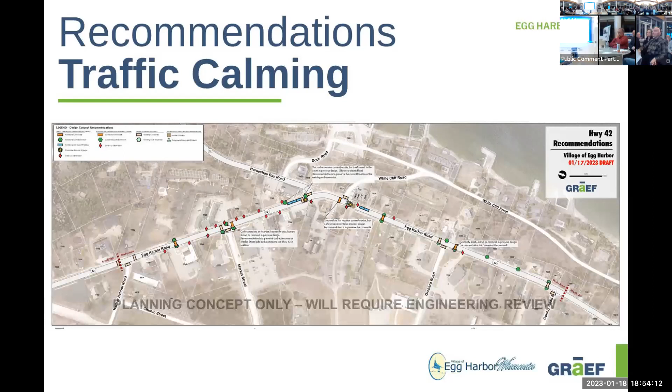Show this slide. So this is just a visualization of some of those larger images. Essentially, curb cuts create additional points of conflict along our roadway and more areas to turn in and out. Anytime you can reduce those, it reduces the point of conflict, which is a potential collision point.

As well as curb extensions, which Mary showed earlier—anytime you bring something into the roadway, it has the potential to narrow it. While several are being eliminated as part of the proposed plan, we're recommending that a couple either be brought back or introduced entirely new as an opportunity to further slow traffic. For the most part, the reintroduction of curb extensions we're recommending would not eliminate any proposed parking. However, there are two spaces that would need to be shifted or eliminated in order to accommodate ours—those exist around Market Street. And then, just a larger image of these.

I want to talk a little bit about this proposed sign. There are a lot of ways to customize these signs—multiple designs of the shape, either this or the school crossing sort of house shape. The size can be customized. The activation type can either sense pedestrians automatically, have a button to be pressed, or remain on at all times, which we're not recommending, but that's an option. It can also be powered different ways.

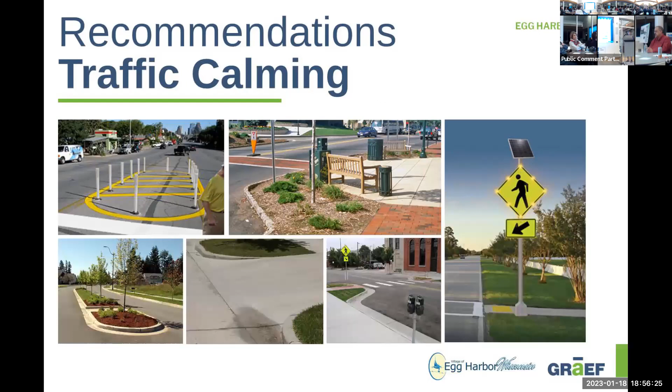Yeah, absolutely. And with that, we welcome your participation on our boards, like Mary said, with the green dots—just leave us some feedback, and that will be open for a week. We'll be here to answer any questions about what we've discussed. And I'll hand it back to Mary or Meg.

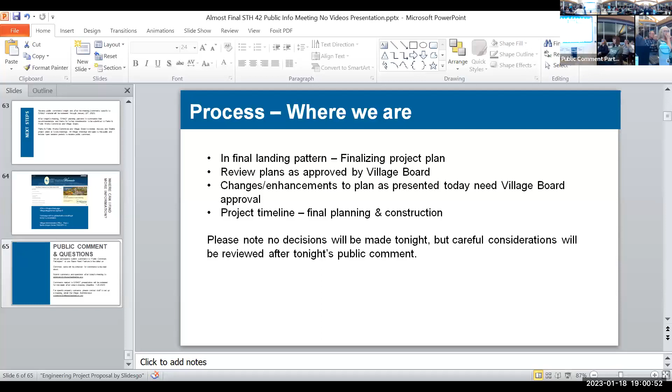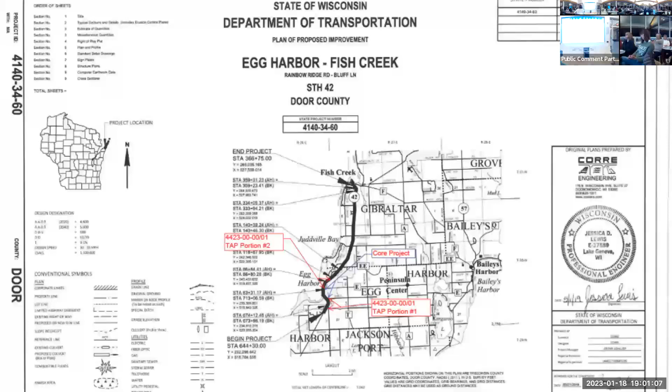Hi, my name is David Sanks. I live up a block or so from here on Highway 42, and I just wanted to point out to many of you in the room that there are some elements of this project that some of us believe need to be taken into deep consideration, and that is the impact this project has on the businesses and residents that live along State Highway 42. Not everyone who lives in that area or has a business there is looking at this as having a negative impact.

There is a great deal of people and organizations that do see some negative impacts, and I would encourage the urban planning people as well as the village leadership to always keep in mind that what we want done in this village might be good overall for improving traffic flow, accessibility for tourists, and for people to get around. But let's also keep in mind that there are members of this community that have Highway 42 as their mainstay. We need to look at the impact this project will have on those residences and businesses, some of which were allowed to establish their footprint without any indication that they were in the right of way or that the right of way was going to be redefined after construction had been done. I do know the village leadership is very concerned about making sure certain things are taken into account and that adjustments could be made.